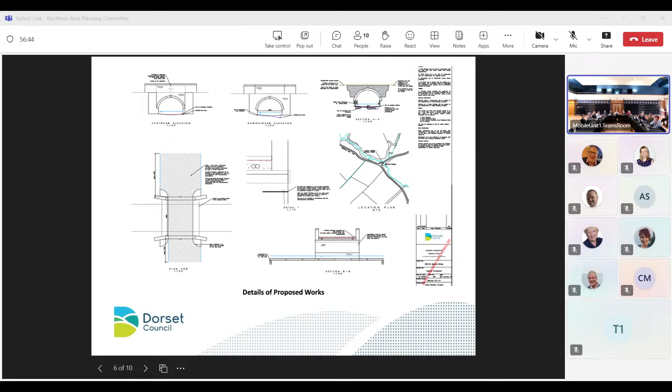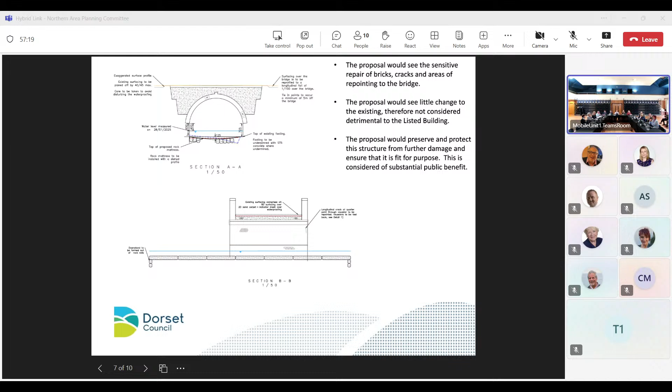To conclude, the bridge is in need of careful conservation, maintenance and repair, and it's considered that the proposed works would see little change to the existing character and appearance of the bridge, and therefore not be detrimental to the special architectural and historic interests of the listed building. There will be some degree of harm, given the repairs are going to be modern repairs and the stitching will be using Helifix bars. But this level of harm is considered less than substantial, and the public benefits of restoring and conserving this bridge for future generations outweighs this slight harm. Thank you.

Okay, thank you for that. Members of the committee, do you have any questions? Councillor Taylor.

Thank you, Chair. Councillor David Taylor, Chelmsford St Mary, and Vice Chair of this panel today. Just a couple of questions regarding the pointing. It states in there that we're going to be using lime cement, is that correct? Definitely not cement, lime mortar. Lime mortar, okay, thank you, because I was trying to clarify that on that one there.

Okay, Councillor Fry. Councillor Taylor, is that okay? And finally, the question which I'm looking at is the either ends of the bridge, is there actually warnings of the edge of the walls? Because cars coming down, is there something to actually help them guide through, especially at night? I was just wondering about the safety, because there seems to be a short wall either end. I noticed that several bridges do have it now. I'm just wondering if we're looking at this one as well. Not that I'm aware of, to be honest with you. It's just a measure of thinking about the safety of the people.

Yeah, I mean, I think the problem is there's lots of bridges in Dorset like this, and I don't think it's a particularly busy road, so I think there's probably ones that have got more highway issues than this one, for example the Western one. All right, thank you. Thank you, Nancy. Okay, Councillor Fry.

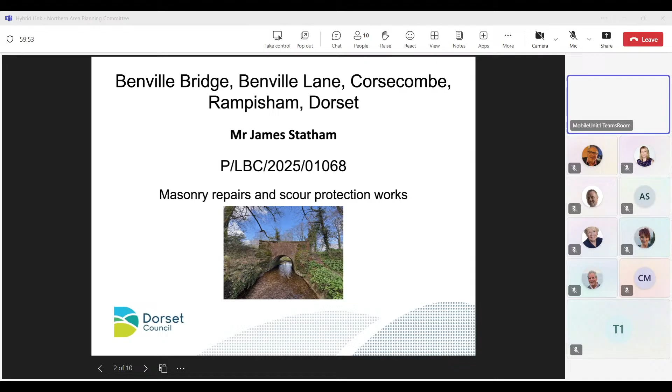Now we go on to the next application. This application is P/RES/2024/07321, land at Glue Hill, Sturminster Newton.

Alex, and she's ready. She's just coming over. Just wait for Alex to get things ready.

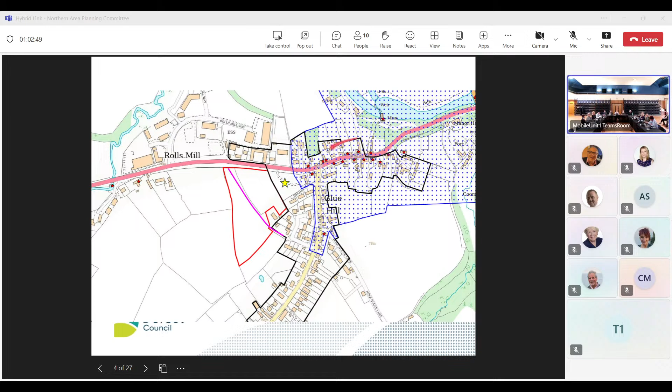That's shown by the pink line here, going from the A357 through to Hillcrest Close. The conservation area is approximately 60 metres to the east, shown by the blue dotted area, and there are various listed buildings in that area as well.

The submitted location plan is next on the screen. You see the site forms part of Sturminster Newton. The A357 runs on the northern edge of the site.

There's a number of residential properties directly opposite, including the courtyard development of Newton Gate, with Rolls Mill Industrial Park set behind these and to the west. The residential development of Barton Close and Hillcrest Close lie to the east of the site, with Glue Hill beyond.

At the time of the outline planning permission, as well as securing matters of principle for residential development on the site, it also secured details of access. The access is in this northeast corner, egressing onto the A357.

Also, through the outline permission, a heights parameter plan was agreed and secured - this is the heights of the houses. The site itself rises up by approximately 10 metres from the level of the A357 to the north, rising to the south, so its highest land is at the southern portion.

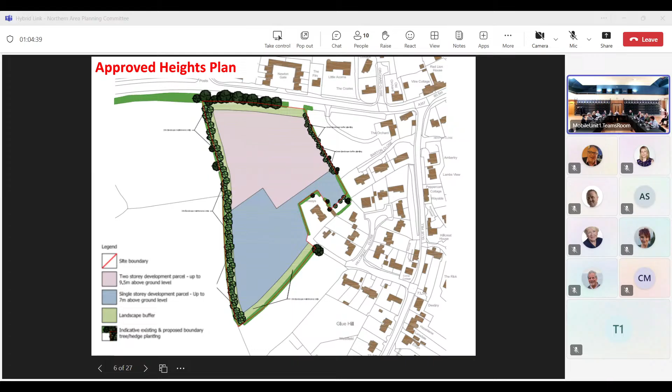As part of this parameters plan, the blue area on the southern portion was secured just for single-storey dwellings, and the northern portion, the pink area, was allowed up to 2-storey. This was in view of the rising topography, which meant the southern portion of the site was more prominent, particularly in views from the west, and in view of the edge of settlement location of the site.

Details of access, again just to emphasise, has been secured. The access is in the northeast corner of the site frontage, leading onto the A357. The plan shows the layout and position of the access - it's to be 5 metres wide, with 2 metre wide footways to either side, the eastern footway linking to the existing footway to the east of the site, providing a continuous pedestrian link into the wider settlement of Sturminster Newton.

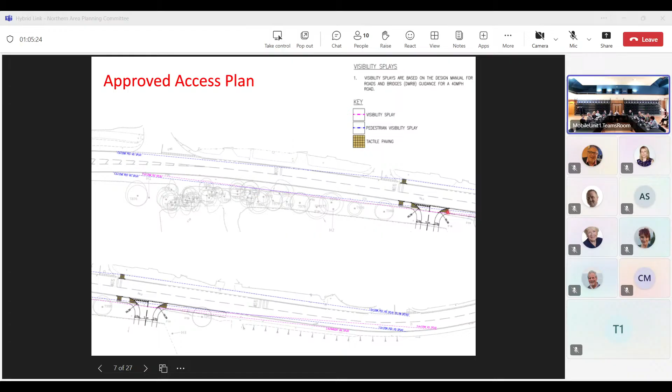Visibility splays are 120 metres in either direction, which is proportionate and exceeds what's required for the speeds on the road.

Through the outline planning permission, the Section 106 agreement secured various obligations and contributions. As part of the scheme, 40% of the housing on site will be affordable, with a 70-30% split - 70% in favour of affordable rent, 30% to be shared ownership. This is fully compliant with our affordable housing policies, and is to be provided on site.

In addition, on site is to be a local area of play. The contributions secured will also go towards a range of local and council-wide facilities, from allotment provision, leisure facilities, primary care services, library services, and improvements to local public rights of way.

The next slide shows the proposed site layout plan. I've included the colour version because it's easier to see rather than the black and white one.

It's not dissimilar in terms of the road layout shown at outline as an indicative plan. The proposal includes a landscape buffer along the west side of the site, which is 10 metres deep, and also along the southeast side. There's an area of open space to the front, allowing some breathing space between the A357 and the built form, and in lieu of the transition as well, to allow for that transition from countryside coming into the town.

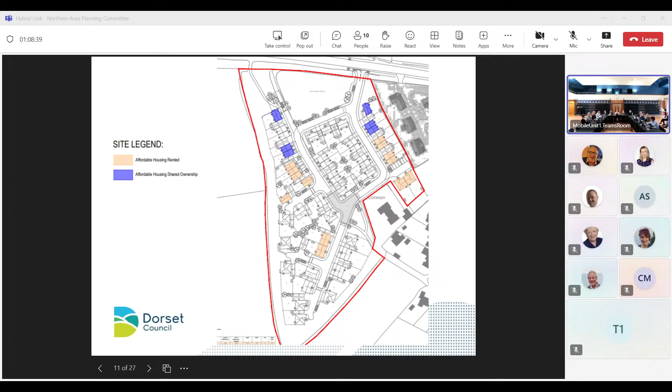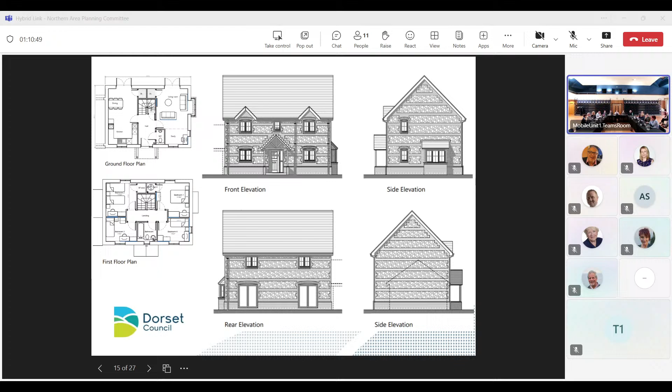And then examples of some of the bungalows on the site. This is an example of the detached ones, plots 10, 13, 18, 19 and 25. It's a 3-bed unit.

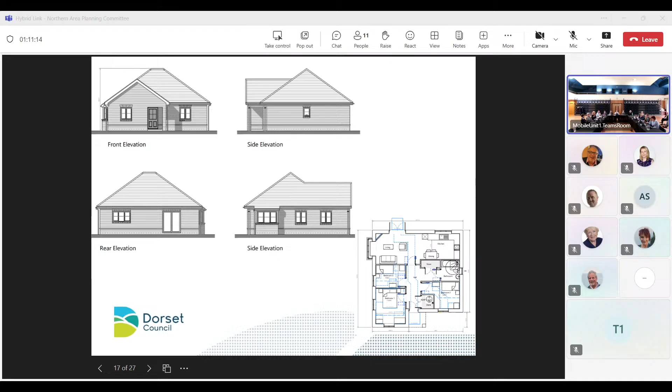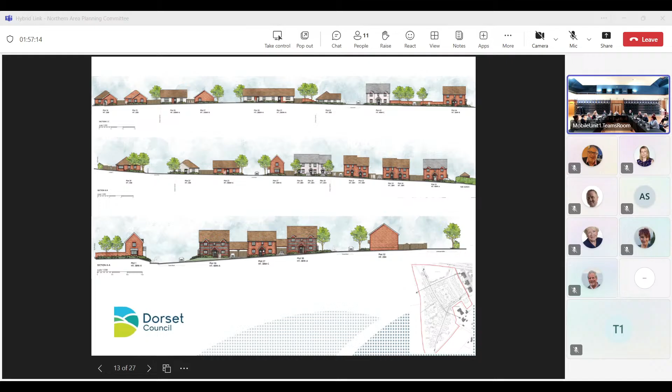And I noticed there's some two-story plots - 28, 29, 30, plot 43 - they're all going to be, I assume, white painted. I might be wrong, but if you could just check, because how visible are they going to be in the landscape is what I would like to know. Also, absence of chimneys - that might be my personal preference, not everyone's, but I like to see a bit of character, because Sturminster Newton's an old market town, it's full of character. Let's put some real good character into this application, please. And also the colour of the render - what is the colour of the painted bricks and the colour of the render, please?

So are you suggesting that the colour of the render of some of the properties ought to be changed to make it fit in the local town? Sorry, Chairman - if we knew the proposed colour, I think there's some prominent buildings there that need to probably be toned down a bit. Okay, thank you. Any other questions, or shall we move on?

Councillor Taylor: Yeah, so one I forgot, Chair - thank you very much for allowing me to come back in. Dark skies - that's the one I wanted to really hit on, because we've got the lighting on the estate, and it's been commented on quite a lot regarding dark skies in the area. It is an area of conservation, and are we looking at this lighting system - if it goes ahead and is put in - is it going to be in accordance with the law of dark skies? Because I think we're in a very important area there, and that's what I'd like to know. Have we adjusted to all that?

I'll take it into consideration. That's what I want to know, because I don't hear it. Thank you, Chair. Okay, thank you.

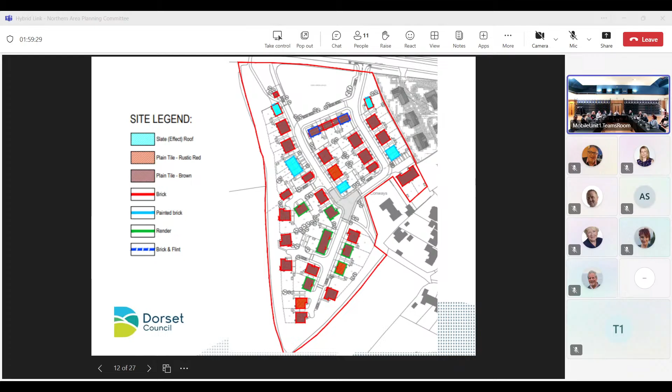So as I say, there is a robust planting scheme. Quite often it's limited to just 5 years in terms of safeguarding that planting going in once it's been put in. On this occasion, I've upped that to 10 years.

There is, during the construction phase, a condition outline - I think it's also reserved on this application - for tree protection for the duration of construction, to ensure that trees being retained are protected during that construction phase. So root protection areas, etc., are safeguarded, and everything proportionate to safeguard those retained trees is being put in place.

Going forwards, even beyond that 10-year period, there will still be a maintenance scheme to look after those landscaped areas, so the likelihood of trees being damaged or lost is minimised. So that's that question - hopefully 10-year cover, with assurance on that.

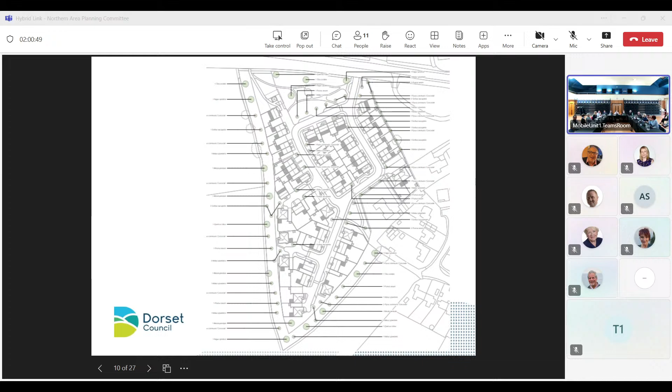There's a question raised on flooding, particularly relating to the access - I think your concern relates to Newton Gate opposite. That access, in terms of flooding, has been carefully looked at by our Lead Local Flood Authority in terms of runoff for the whole site. The site slopes from south to north, down towards the A357. So all the information informing the proposed drainage strategy has been considered by the Lead Local Flood Authority and found acceptable at this stage, demonstrating that an adequate scheme can be put in place. There are conditions on the outline permission to ensure further detail comes forward on the finite detail of that drainage strategy.

That will be delivered and is agreed on. In terms of the access itself, that falls under the controls of the Highway Authority, because there's a new access going in. It will need a Section 278 agreement, so that sits under the Highways Act, not planning, and drainage will also come into that. The Highway Authority will not wish to see surface water streaming down from that access into the road, which is sensitive to surface water flooding. So you've got two authorities safeguarding and looking at the drainage in that area.

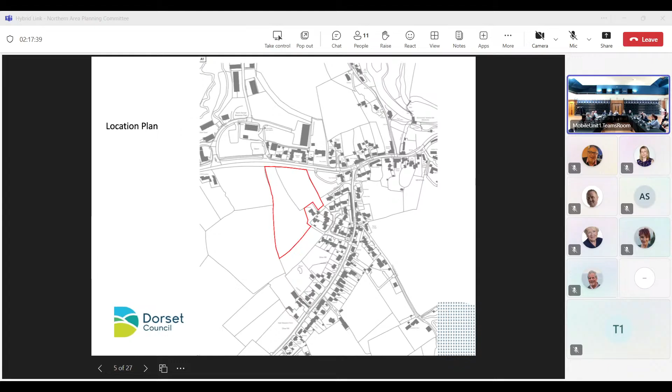Okay, thank you for that. I think we can now resume. Finally, do we have any more questions with regard to the application, or are we ready to move to the debate? Okay, then. We shall now move to the debate. Does anyone have any points? Councillor Pothecary, please go ahead.

Thank you, Chairman. I've already had quite a lot to say about this, and I would just like to propose that we accept the officer's recommendation and approve this application. Thank you.

Okay, thank you. Councillor Vitali. Thank you, Chair. I just thank the solicitor for setting out the purpose of this meeting.

And much as this is a debate between us as committee members, I thought I'd just engage with some of the comments made, not least because our residents are the people that vote for us, want to know that we're listening to them. And I can assure them that we do.

I represent a ward of small villages which are taking hundreds of homes in the next 5-10 years. So I speak to residents about this daily. I know that Mr. Mason was frustrated by the procedure and the fact that he was limited to 3 minutes. I'd just say that those procedures are absolutely crucial to the integrity of this process.

As a counterexample, imagine if we had a situation where someone in favour of the development came and decided they were going to speak for 10 minutes. They would rightly be extremely annoyed that the process had been diverted. So it's really important that those procedures are followed. It's also important for the robustness of our decisions made here as a committee and that they stand up.

Mrs. Lewis raised the local plan. I couldn't agree with her more. I think it's shambolic we haven't got an up-to-date local plan. It's something that a lot of us have spoken about, and we're going to be working really hard to get that done as quickly as possible. But that is the principal means by which people that live in Dorset get to control and direct and shape the development in their local area, in addition to the neighbourhood plan.

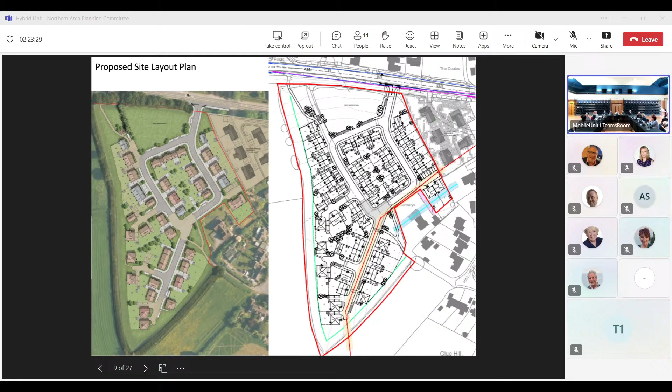So please, could people just hold on a second. Subject to the conditions, Condition 6 and the additional - subject to two conditions. Condition 6, updated, which is on the screen here, is to do with the biodiversity plan, and also an additional condition to remove permitted development rights for single-storey units to prevent them from adding additional stories. So those two conditions are being added.

And the informative note on the footpath, and also with regard to the footpaths and rights of way. Is that all of it? Yes, thank you. Okay, thank you very much. Pleased to propose those included in the proposal to approve.

I particularly like the removal of permitted development rights. I wish it would happen a bit more often, actually, but it's so appropriate for this development. Thank you. Okay, thank you, Councillor Apothecary.

So I think now then we can go to the vote on this recommendation. All those in favour of it? Eight in favour. Any against? No. So that is carried unanimously. The recommendation has been approved, subject to those additional conditions.

So this application, P/RES/2024/07321, land at Glue Hill, Sturminster Newton, has been approved by this committee for the recommendations to be followed with those amended conditions. Okay, thank you very much, everyone, for that. So now we move on to the next part of the meeting.